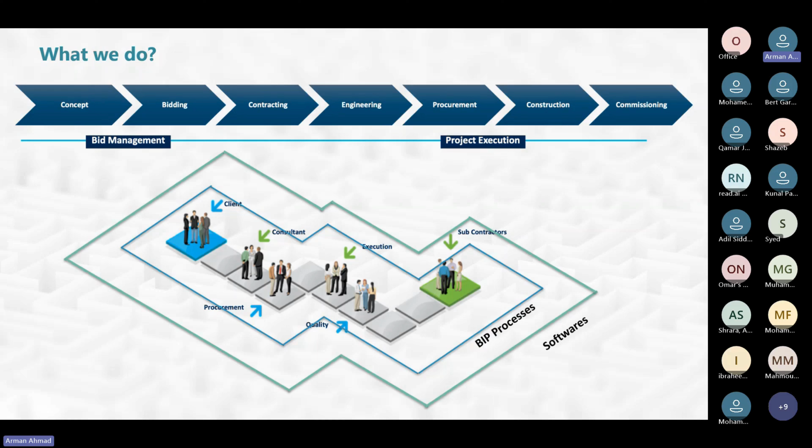Now, in a multi-million dollar project, managing those with lakhs of activities and transactions, it is very tough to optimize the processes. So first, one of our services is where we help customers, whether owner, consultant, or contractor, to adopt industry best practices. Why? Because once the process is aligned, then only we implement the softwares on top of that.

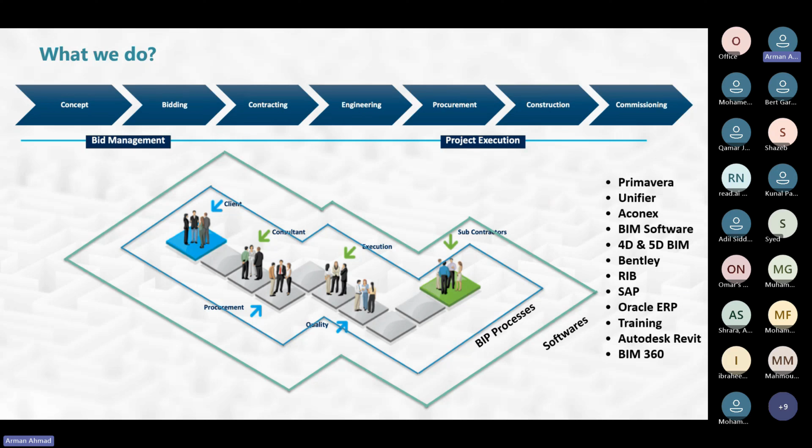So there are a lot of softwares we use to help the customer digitize that. We even guide the customer to decide which software they should buy at the time of buying any software, because we will be proposing the best out of breed from the industry, not one specific product in any industry.

Now this we have already gone through. I will quickly go through the first topic, what is PMIS. So what is PMIS?

PMIS is a digital transformation of the complete project life cycle, which includes your planning, executing, monitoring, tendering, bidding, cost control, communication management, quality management, even safety, schedule management, project charter. So all these processes we implement in such a way that every process is tightly integrated, and we also provide a project dashboard, PMIS dashboard, which takes data from different departments, different software sources, and represents it in a front end dashboard.

Now, currently, what is happening in industries? They are managing every project department in silos, where we don't have any integration, for example, between quality and execution, or execution and engineering department.

Okay, so they do manage at an individual level, but the PMIS implementation will help you get everything end to end integrated, and every project life cycle monitoring can happen on a single platform, which is the PMIS dashboard. In some cases you may have to bring data from your ERP, which is already implemented within your organization, and through that you can build a live interactive dashboard. So this is what is called a project management information system.

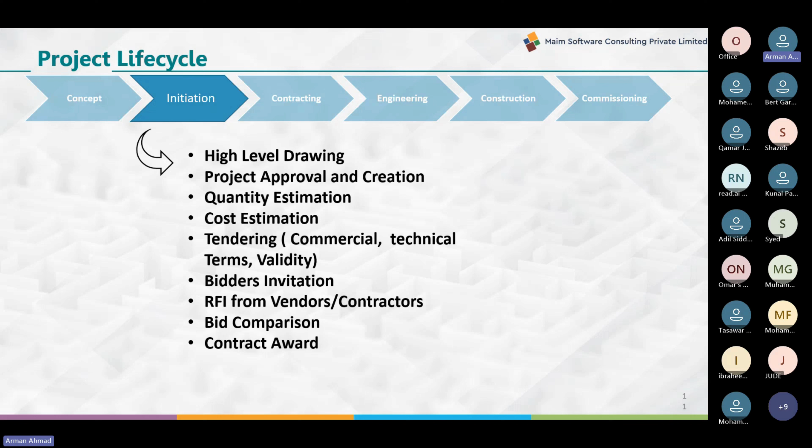Then once the contractors submit their individual proposals, you do the bid comparison, then the contract award. Then fund management, since you definitely need funds for releasing money to any contractor against the invoicing, the contract, or quantity invoicing. Engineering is the main area actually linked with BIM.

So you're doing the high-level drawing, detailed drawing, then drawing approvals, drawing changes, revision control, and BIM is actually generated in this phase itself.

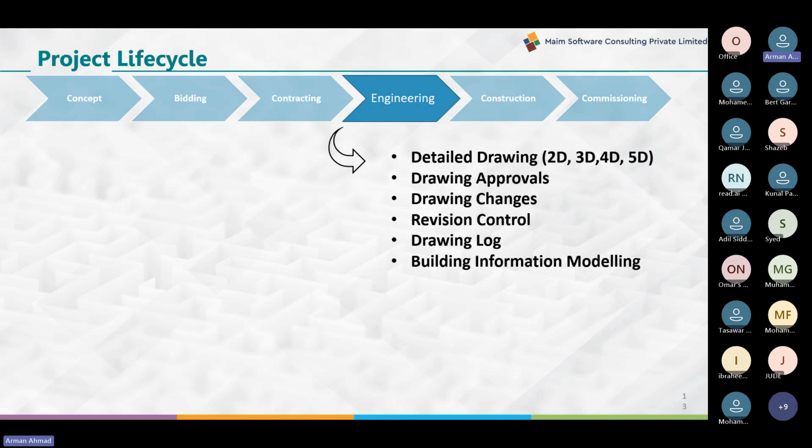Now, during construction: project scheduling, construction at site, daily reports, construction monitoring, HSE inspection, these are the processes. And commissioning includes the trial run, commissioning, site closure, sign over, handover, material reconciliation, as-built drawings, and final closure.

Now coming to understand what BIM is. Before understanding BIM, let's highlight some ongoing challenges and issues that we usually face on site.

As an example, let's say this is a metro station, and one CCTV has been installed for the last 5 years. Now it's not working. So what will you do as a maintenance engineer? You will go and check the inspection date, warranty document, who inspected it, on what date it was inspected, or you may use an asset management or maintenance software. You will log in and check all these details. The visualization is completely out of the way, managed virtually.

You will search through different data sources like Excel, PDF, and different software. Now, how will BIM help?

BIM will literally let you select this in the 3D model. You will select this CCTV, download the RFIs, who has inspected that, check the warranty directly on the 3D model. So it changes the perspective of how you want to manage the project.

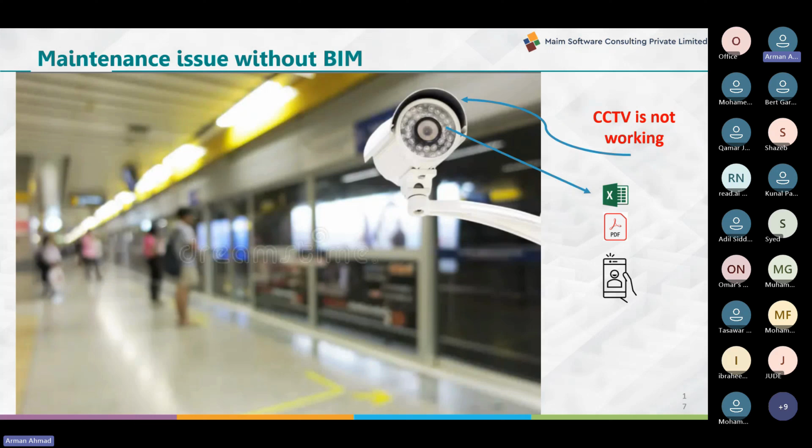So the 3D model is going to be used till the maintenance of your project. BIM is getting extended from 3D to a further level where you will explore BIM. Through BIM you won't need to explore Excel and all that. You will simply click the model and download all the information related to managing your project, managing your asset and maintenance, for fixing this CCTV. So BIM will actually help you in that respect during maintenance also.

Let's take an example of a live issue. Being a civil and mechanical engineer, you can analyze this as a design issue, where you can see that this particular pillar is getting intersected, and this is getting collapsed - a clash detected, basically from this pillar.

So how will you avoid that? This is a design issue. You will approach the designer, check the as-built drawing, and try to fix it accordingly. Or during the execution phase, you will ask your designer to change the drawing and correct it.

Here BIM will also help you. BIM will basically help you bring the civil 3D model and the piping 3D model to import into the same BIM software environment. You will do the clash detection and find it saving a lot of money on rework and so on.

So I personally like one of the big features of BIM, where you are avoiding future issues during the design phase itself, which could have led to loss of money, loss of life, and a lot of other issues. So BIM can help early during the design phase itself with clash detection.

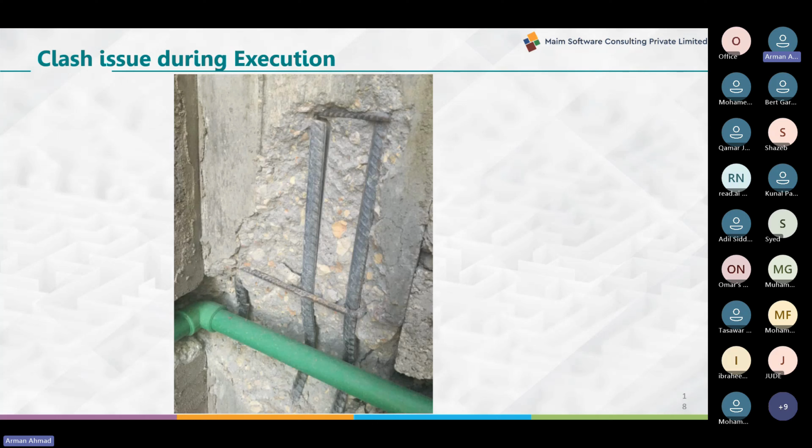Let's try to understand what is BIM. I have highlighted two problems so you can visualize how BIM can help you. So what is BIM? Let's try to understand in two aspects - one, life without BIM, and one after BIM. So what was happening without BIM currently, and everyone can agree with me on this.

Currently either you are creating a 2D drawing and from 2D creating a 3D drawing, or in some cases directly building the 3D drawing. Now this drawing is being used up to the maintenance level, but the approach is different. That means, as an example, if you want to do the estimation, you are literally opening an Excel sheet, counting all the windows, gates, doors, CCTVs, ducts, lengths, structural steel, reinforcement material - everything you are maintaining either through some software or Excel. So this is how it's currently managed.

Even in the 3D model, during the project planning itself, what is currently happening? Schedule is basically managed either in Excel, Microsoft Project, or P6. There is no linkage to the virtual representation of the progress of the project. So this is also being managed separately.

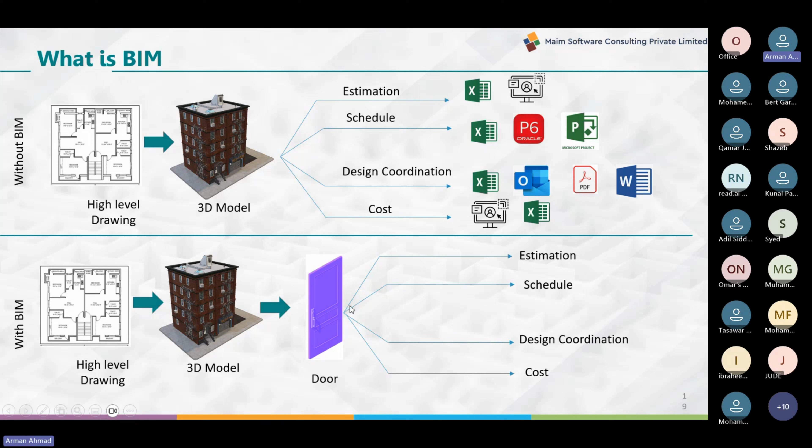Now coming to the schedule also. This door should be highlighted in red because it is critical, just like a critical activity in your scheduling software, and in this schedule you are going to link it. Now this particular door will also have the design coordinated. If somebody has a coordination issue, you can basically select this and coordinate with the drawing, even for the door.

So the cost also you can basically designate. I want to make a stop here - I forgot to include this, my bad, Mr. Yamen. But the good thing is this is the main slide we wanted to focus on. Do you have any questions?

I think just for the knowledge of the audience, Mr. Yamen Mahok is also on this call who can answer questions for our Arabic audience as well. Mr. Yamen, you can also check with the audience if anybody has any questions in Arabic language.

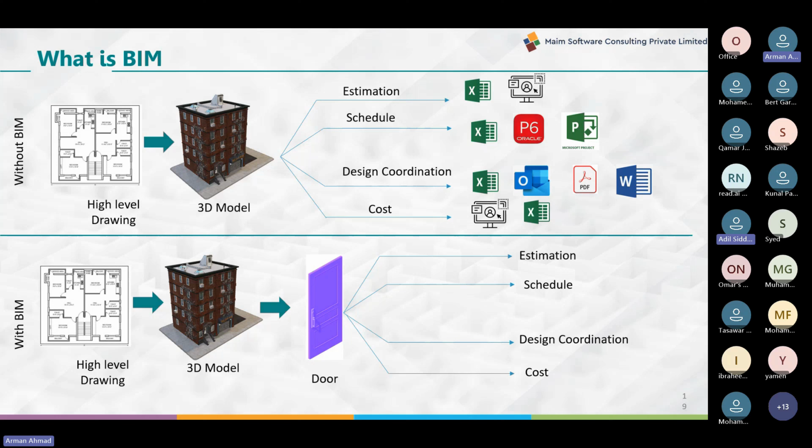Building information modeling, BIM, is a digital process that involves creating and managing a comprehensive 3D model of a building's physical and functional characteristics. Until now, before BIM, 3D was being used just as a modeling software to create a drawing, which you could give as a printout to the fabricator or fabrication site or construction site, and they would construct as per the 3D and 2D model. But now BIM extends beyond that - it integrates geometric and spatial information, data about a building throughout its life cycle, from design and construction to operation and maintenance. The best part is that it goes beyond operation and maintenance.

BIM also helps architects, engineers, contractors, and facility managers collaborate more effectively, improve accuracy, reduce error, and streamline workflows - meaning approvals. Yeah, I mean, you can add if you want. Do you want me to translate it in Arabic?

Yeah, the BIM one, because this is important.

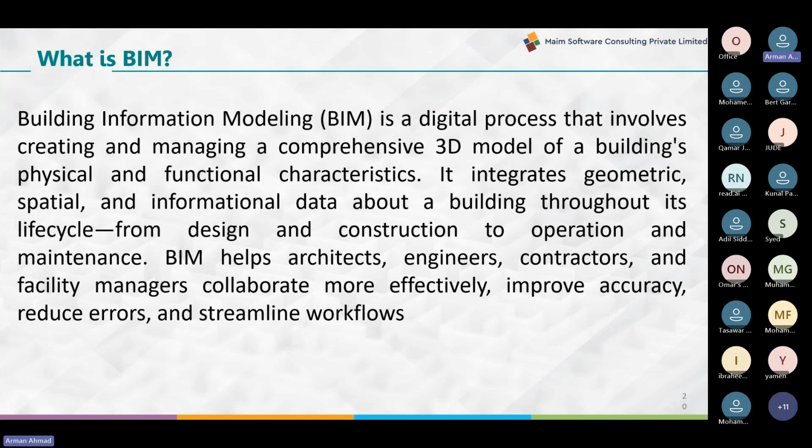Yes, you can. Now, how did it evolve? During the 90s, we were using basically Autodesk AutoCAD for creating drawings. Other software was also there, like Catia, Pro-E. Slowly it went to 3D model.

During the 2000s, the 3D model was being used for maintaining accuracy, visualizing in a more accurate way. Now we have BIM here going ahead, because BIM will also extend a flexibility of integrating this with any software with the help of integrated web services.

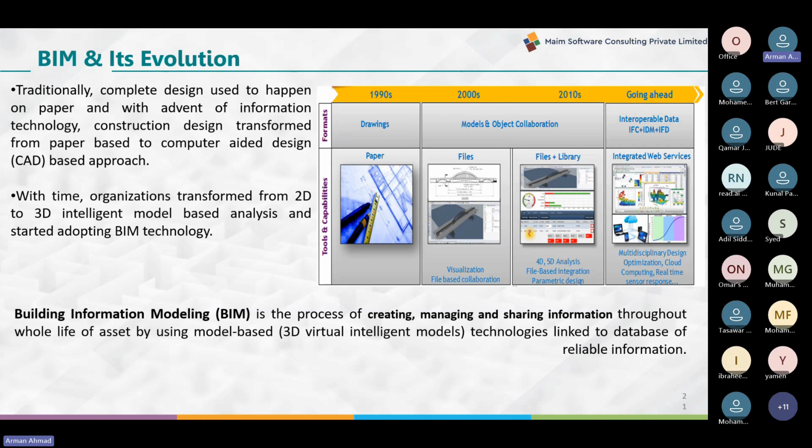So now any model or element, the drawing is being stored in a central database, exposed through web services. So you can basically go and integrate with any dashboard, or any SAP, ERP, Oracle Fusion Cloud, or Primavera, or any estimation software. All of this is integrable.

Now coming to LOD details, level of detailing. In BIM, there are different levels of detailing. When a designer prepares LOD 100, it is very concept phase, high level, and not very detailed. It is basically used for making estimation at the top level.

And LOD 200, you will see the elements are modeled with normal size and all. Even quantity will also be defined, but only as rough estimates. It is good for further design and redesign.

Yes, you can continue. Now, the same way, if you go further down, this is LOD 300, 350, 400, 500. This 300 is a detail, precise level where you will get all initial input, whether it is quantities takeoff or graphical location. It can be used for fabrication, detail analysis, and all.

350 is something where you will start coordination between different disciplines. For example, mechanical and civil, both structure and civil, you can get coordination. In 400, it is actually being used for shop drawings, manufacturing, assembly planning. And last is 500. That means once your facility is being constructed, actually what has been built, you will create as-built. So these are the four more.

Mr. Arman, I have one question. Tell me. Sorry, can I go ahead and ask the question? Yeah. Okay, thank you. So generally, for all these LODs, for the various categorization that we show over here on the screen, is there a particular kind of set of user categories who are entitled or who will be basically consuming this classification, that I'm trying to understand?

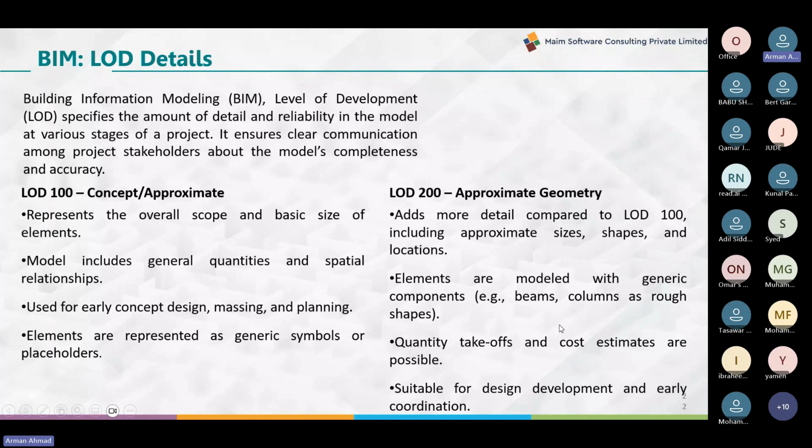Yes, this is a good question. So there's two approaches. When the person who is actually designing the software, the design department, it will be the same, starting from LOD 100 to LOD 500. Maybe in some companies they do have a detailed designer, like it started from high level LOD 100 where a senior designer was constructing it. Slowly it has gone to the beams and pipes. The same designer is being involved, who is creating this drawing in the BIM tool.

But the moment it comes to LOD 350, now the other designer comes in. As an example, we have seen a case of pipe and civil structure. The pipe model may be designed by the piping vendor, and the civil is being designed by the civil vendor. So more detail you go, more interaction or more different stakeholders come into the picture. The more detail will go, the more stakeholders will come into the picture, and they will be involved in this further detailing. Is that fine, Adil?

I have one more question that I'll ask later. Ah, okay, no problem, sure. Thanks. Somebody is asking like how to reduce cost from BIM, something like that.

Yes, Mr. Ali has that question, I think. So basically, as a whole, we will talk about the benefit at the end. We have a slide on what is the benefit as per research already done by some known sources. Then we'll discuss, and I will put my point of view also on how it will reduce the cost.

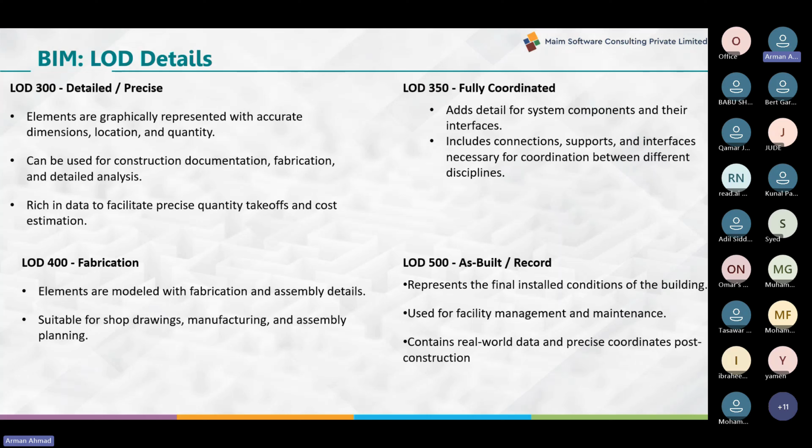Now let me walk you through one of the features, and slowly we'll go through different features. Clash detection. As you reach LOD 350, you're going to start doing the coordination with different models.

Now, you can see that we have seen these issues during execution, and it really impacts a lot of rework. But here's the good thing: if I'm an owner company, I've deployed three different contractors, one for piping, one for structure beams. So this beam model, when you import it into the BIM model, along with the other model, because you've already given a high-level drawing to both parties, if anyone makes a mistake, it will create an intersection, that is a clash.

So before, this is what used to happen: I spent a lot of time inviting the designer who initially designed the model to explain why we're facing this issue. Usually the designer who designed the model was not frequently visiting the site. But due to BIM, the clash detection feature saves a lot of rework, money and time, because you're doing the clash detection directly on the 3D model itself.

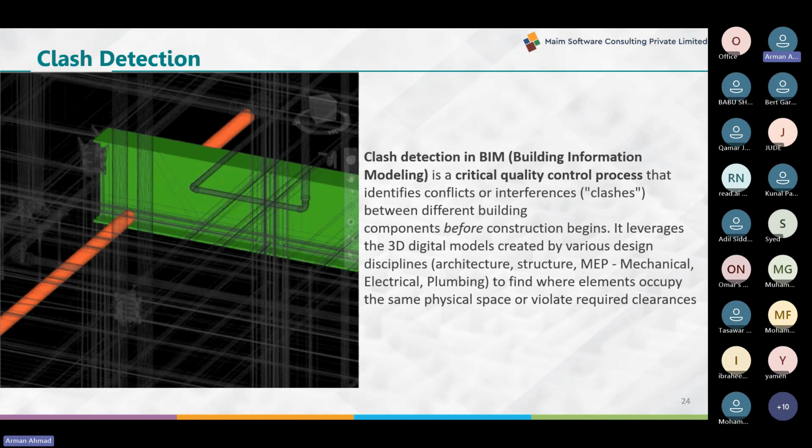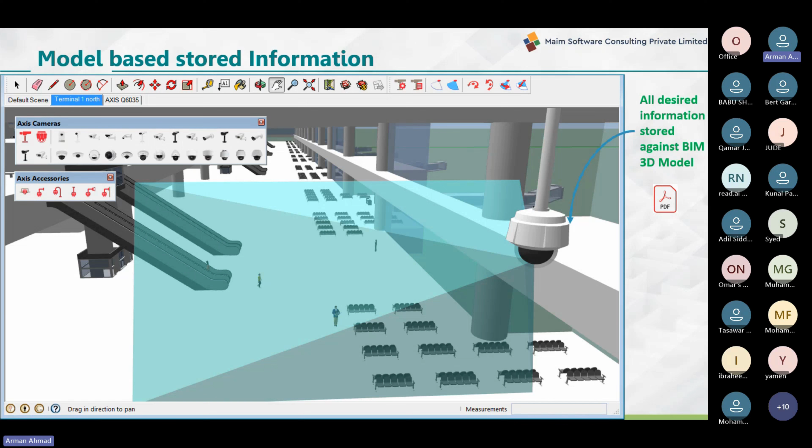There is another advantage you get, which is model-based information. If I say model-based information, that means the length, breadth, height, make, brand, and quantity, all of this will be stored against the model. So if I pick any 3D model and click it, you will have all the information, including the length and breadth, and the position you want to see. All of this is stored against the 3D model.

There is another advantage, the material takeoff. This is one of the great features for basically doing estimation. How was estimation done previously? Literally out of the 2D drawing. When I started my career, my manager asked me to calculate the BOM of each drawing: how much structural steel there is, what the length is, what the size is, what the make is, and make an Excel sheet, because that would be used to multiply by the rate to get the total material cost of the project. This was being done manually.

A lot of software also came that did this, but BIM gives the flexibility that within maybe a maximum short time, you can very easily download the elements into an Excel sheet. From there you can add the rate, which means you can also load the cost of that model. So it gives the flexibility to give the right estimation of your project.

Sorry, I already missed it. So this is important, I wanted Yamen to repeat the material takeoff slide in Arabic. My bad. Yes, no problem. Actually, guys, if anyone has a question in Arabic, he can ask. Ahmed also described it very well. Can I talk now?

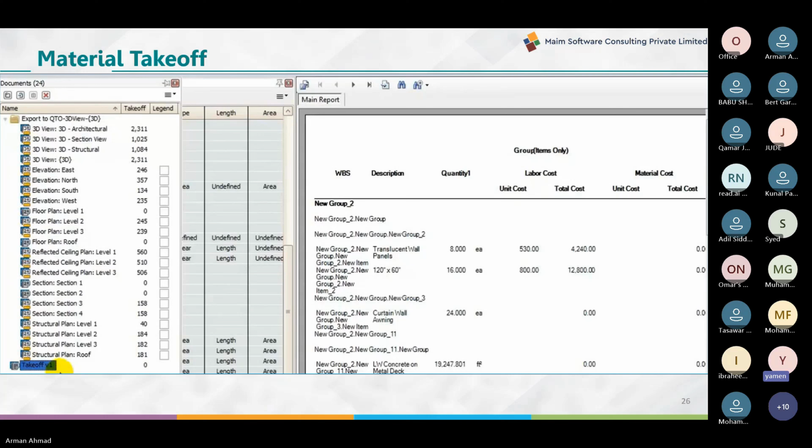Yes, you can continue. Thank you. So this is what I was telling you, that out of the material takeoff you can do the estimation, or even use this takeoff for your estimation software. There are a lot of estimation software like Cost OS, which you can use with this takeoff to get the cost estimate of the project.

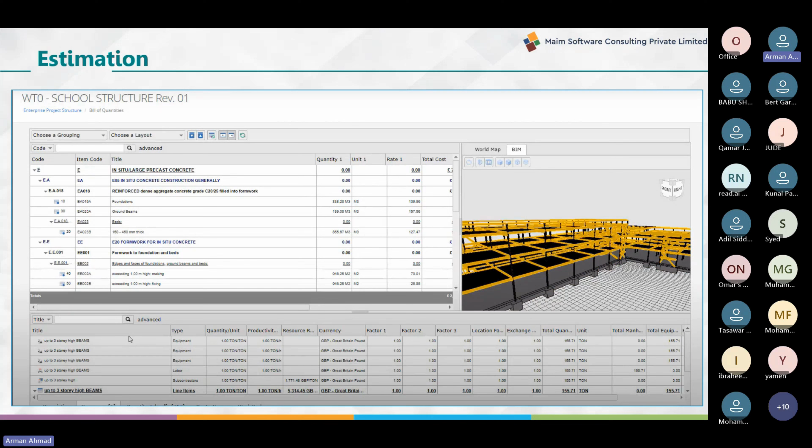So, till now, do you have any query, input, or anything you want to ask? You can also message in the group.

Yeah, I think that cost part is still unanswered. Maybe you want to take that later on in the slide. Yeah, plus there are more questions coming up later in this session. Yeah, fine, thank you.

Okay, now this is one of the great features, since we already have people from the background who have used Primavera directly or indirectly. Primavera is one of the preferred scheduling tools in the market, and even Microsoft Project also.

So basically, when your 3D model is linked to time, it is 4D, and when it is loaded with cost, it is 5D. What does that mean? Let's say if you have a building and door is an element. In the 3D model, I know the length of the door, height, make, quality of the door, everything, but I don't know when it will be installed. So it should have two data: one is the baseline dates, and one is the actual dates.

So 4D means I will assign all these elements with the respective activity of the project from P6 or any MSP, and every element will represent when it should be completed and when it is actually completed, highlighted in a color. Or if it is not completed, it should show something in red. That means now virtually you are getting a live status of your project.

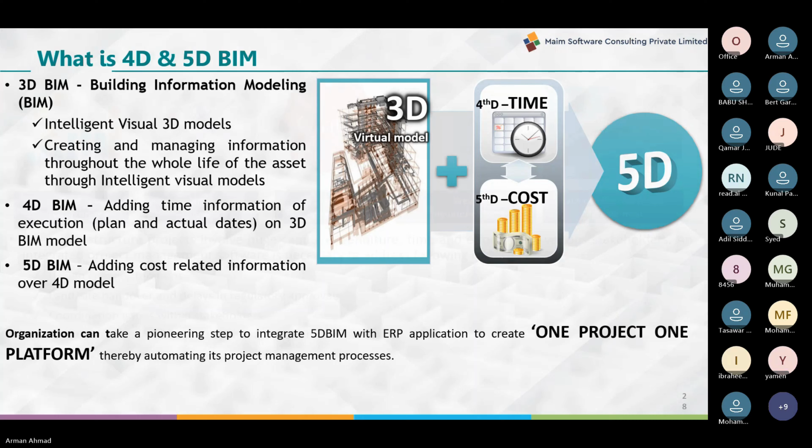So why 5D BIM? Because definitely it is going to reduce cost overrun. The reason behind this is you are analyzing the cost directly on the model, and there is very less chance that you will be wasting a lot of effort applying more resources than actually required.

Time is also saved, because here you are not going to learn a new software to monitor time. As an executive you will virtually see which pillar is completed and which one is not. So higher management will literally zoom in and watch it.

In my personal case, when I was involved in India's first 5D BIM project, there were two TVs installed. One was giving live CCTV footage of the site from different cameras, and the other, the director of the project, was visualizing the project by 3D model, so he could zoom in and check the performance of the project virtually.

Quality also improves, because features like clash detection create a high-quality ecosystem. And also, document management is a bigger challenge, and there are a lot of software in the market which do document control.

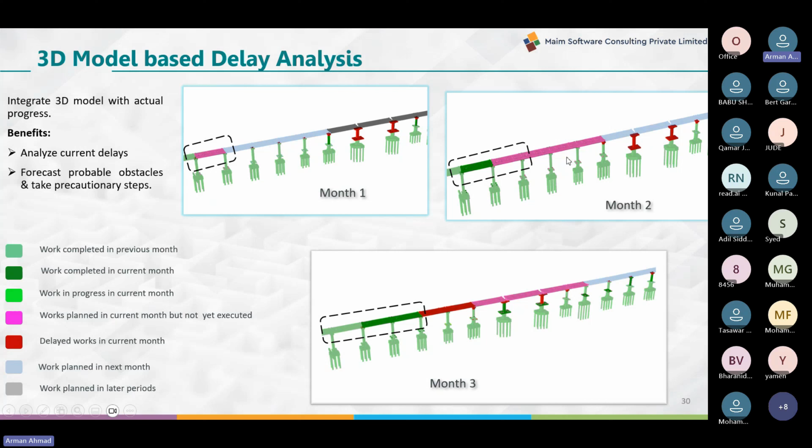Now this is another feature which BIM provides, and I have taken one screenshot from that, because you are going to load time and also cost in terms of different factors like BOQ cost. If you are an owner company, then BOQ cost is your own cost. If you are a contracting company, then your BOQ cost, material cost, and labor cost—all these costs you can distribute.

Now the moment you distribute it, it is also distributed in a time-scaled way—January, February, March, April. Through that time-scaled way, BIM also calculates the earned value curve, depending upon the cost assigned for each month.

So in your BIM software, not only time progress, but also the cost progress you are going to get. Now one thing I just wanted to highlight.

For achieving this, what do I have to do as a BIM consultant? This is one question. There are two major, bigger challenging tasks: one is importing the 3D model into the BIM software, and selecting each and every element. This is massive work, not easy work.

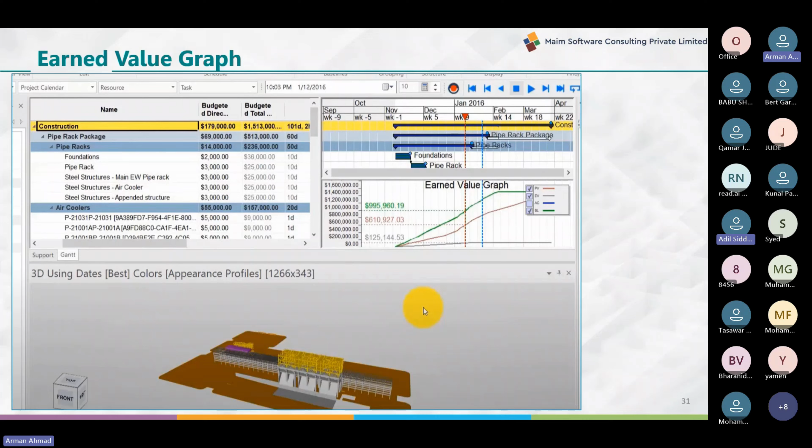I think you can continue, Mr. Ahmad. Yeah. Thank you for the question, and the answers we can continue later in the session.

Now you will see this—this is one of the screens which I have taken from one of our past projects, where we'll see this video directly. Give me a second. Here we'll see the time progress, the time stage of the project. Right side is the modeling and left bottom is the cost.

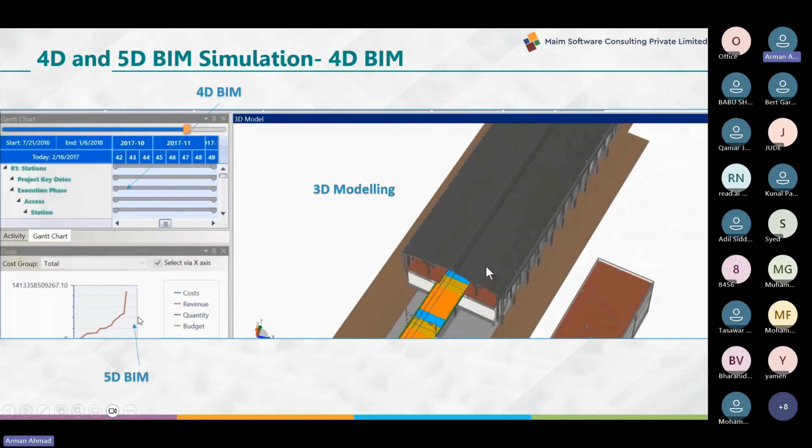Now, what are the different applications available in the market to explore and purchase? Autodesk Revit is there. Most people in the construction industry are very well versed with Autodesk. They have Revit, and then they have Navisworks.

There is a company called Bentley Systems. Bentley has a plenty of variety of software, divided into different modules, like ProjectWise, then Synchro. Bentley Synchro does 4D and 5D BIM. Then there's also RIB iTWO, another company which provides this BIM feature.

Then there is Tekla Structures by Trimble. Trimble has their own product. Autodesk also has Assemble, so they have multiple software like Navisworks and Assemble, and both do the same part.

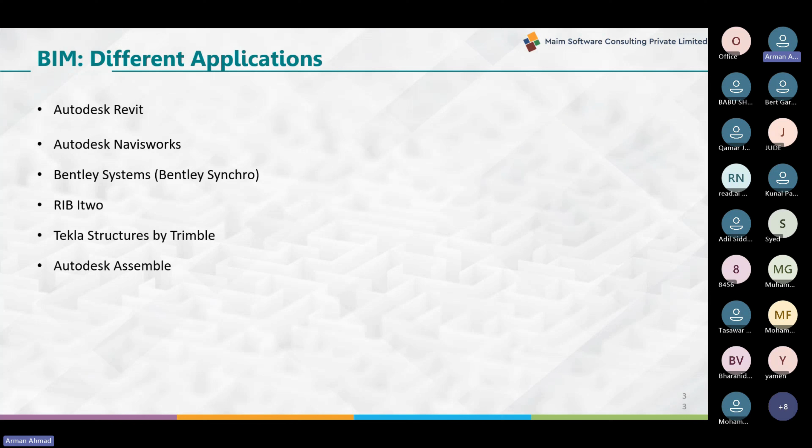Navisworks is good for contracting-based companies, where you are purchasing the items on your own. Assemble is best for both the nature of projects, whether owner or contractor.

Now let's talk about one of the PMIS solutions built over BIM. This is the final solution we wanted to present in this webinar. When we talk about PMIS, we already know it's an integrated system where we get information on the complete project processes, status, and cost from an integrated system with the help of multiple software. But here we'll also see how BIM will look like in terms of building over BIM.

I have designed this solution based on one of my past case studies. It was for Nagpur Metro in India, built over 2016, where different software was already being implemented. I derived this with our best industry practices and my own experience.

So let's say you already have multiple software in your company. You have 2D drawings. Previously, the 3D was being designed out of 2D, but nowadays you can start building the 3D directly on the BIM model or BIM software. So designing and creation of the modeling is the first step—that means you are literally creating the 3D model, and on that basis you are doing all the other processes.

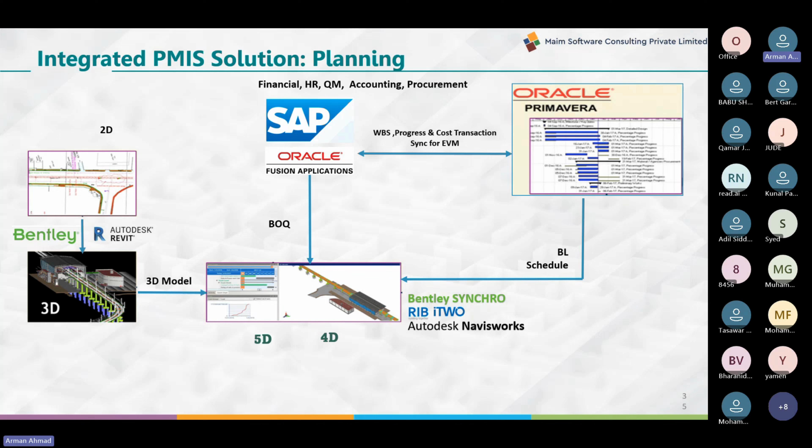So I will show you a simulation video. It will show you the baseline—you can see this through this video.

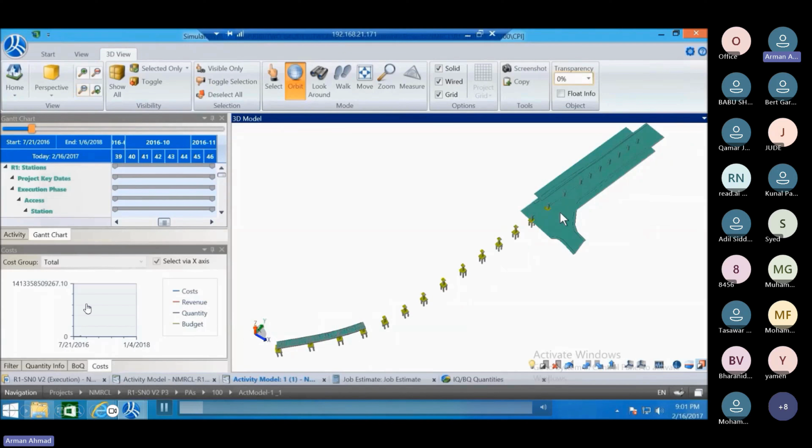In the left top, you have the time planning. Bottom is the cost planning because you have already attached the cost. And the right bottom, you will see the fashion of each element getting constructed.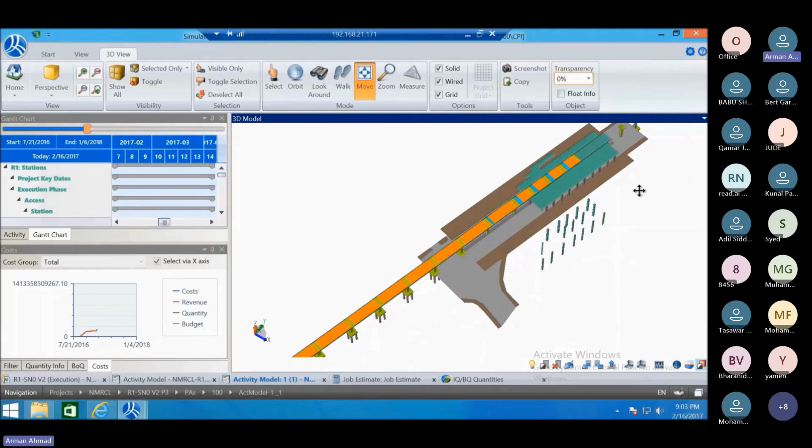So that means if pier is being constructed below the viaduct and near the stations, and if you made a mistake assigning the predecessor and successor activities in P6 and assigned it to the 3D model, the model will also simulate in a wrong way. Maybe the viaduct and bridge will get constructed first and the pier will be last.

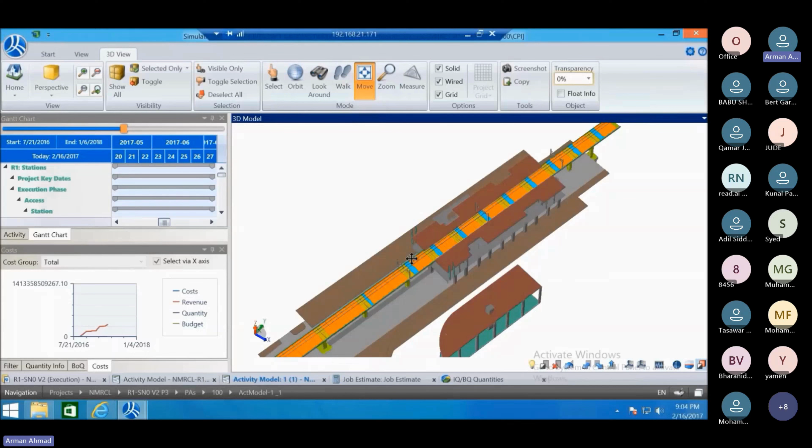That's a worst case mistake which we used to make. So your predecessor-successor assignment determines how this flow of construction will simulate. Your project plan is now totally going to visualize to higher management with visual project, showing construction happening depending upon the predecessor and successor of the activity assigned in P6, which is integrated with the schedule module of that BIM tool.

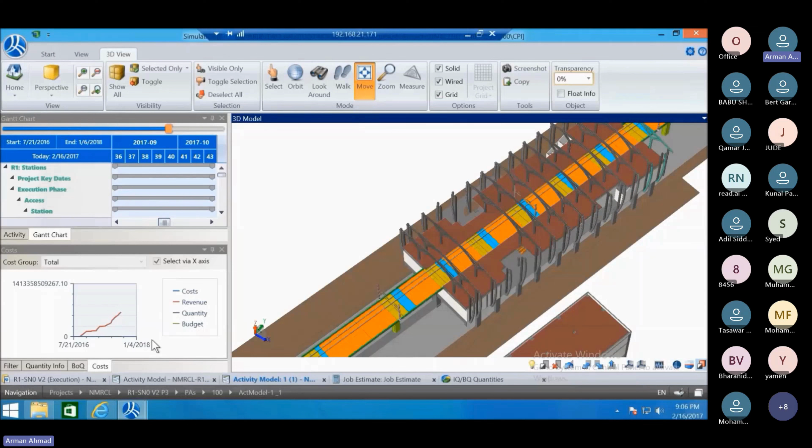In the bottom, you will see that slowly you are completing one activity and element after another in the 3D model, and definitely you're consuming cost also. So this way you are having a clear simulation of your planned project.

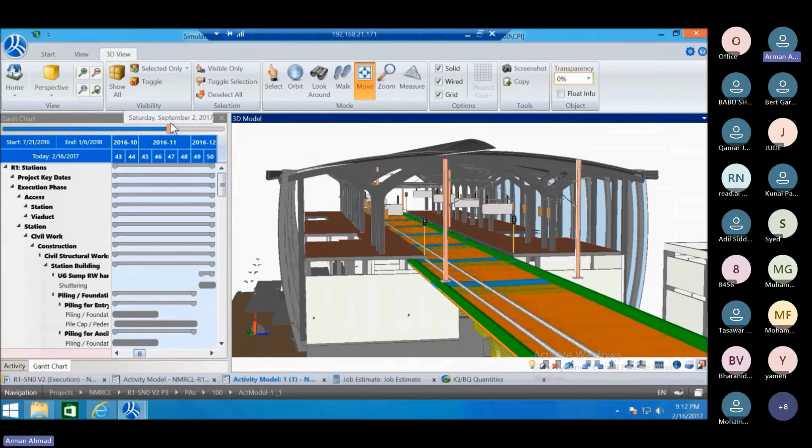Now you can see this is completely integrated. That is why it is called PMIS-based, integrated BIM-based PMIS solution. Now you can see it is being constructed slowly, you can zoom and go there, and you can see this project is as per the plan. So it will visualize how your project is going to be executed in the future because it's a baseline.

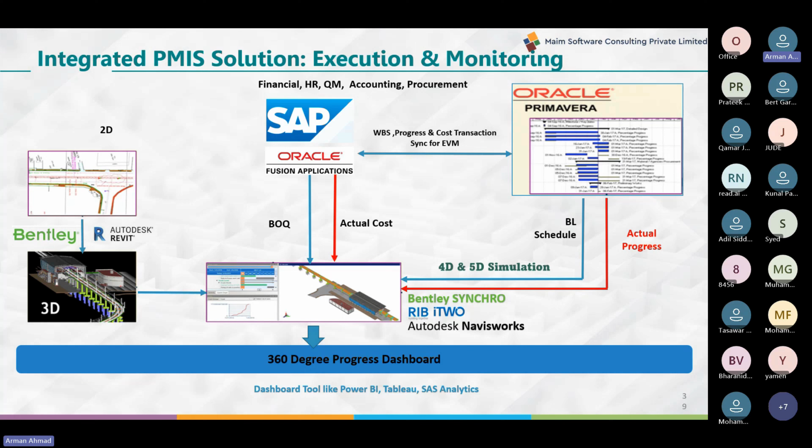Now we'll talk about the benefits. What are the different benefits we are getting from BIM-based PMIS solution? During design, it definitely avoids a lot of rework through clash detection. You get latest information and detailed planning. During planning also, you get the critical path visually highlighted through different color coding.

During execution also, if you integrate from SAP, it gives value addition to the execution team itself, because they are not going to analyze construction compared to Excel or Word. He will literally be opening the model and checking every detail in the software directly over the 3D model.

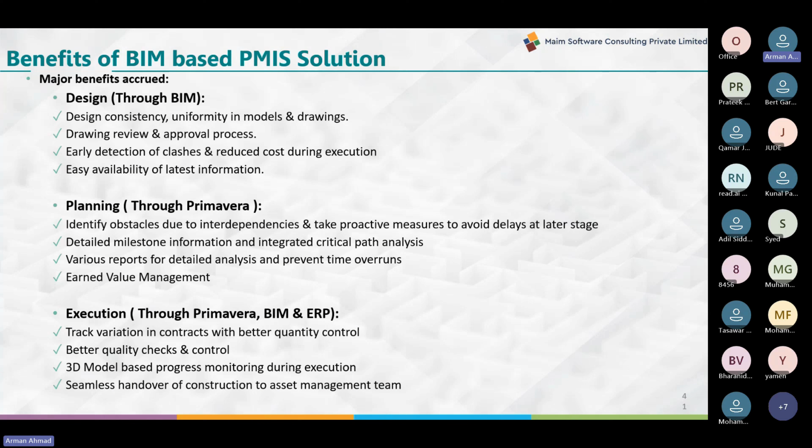Now, this is one of the benefits being captured, and the main part is a study done already in 2015 by EC Harris, where someone was asking how much cost is being impacted. Yes, definitely it reduces major cost by 30%. The reason behind that is clash detection, which avoids a lot of rework, design issues, and design aspects.

Even during construction, if design is perfect, construction issues also get resolved. Even during construction and operation - operation is one of the most important things, where maintaining an asset, you will have a real-time effective solution because it saves huge time in maintaining any items. If any equipment stops working, most time is spent in maintenance of that, but before that, literally searching for the respective document related to maintenance is now way easier and faster. So I think the question raised about cost has been answered, right?

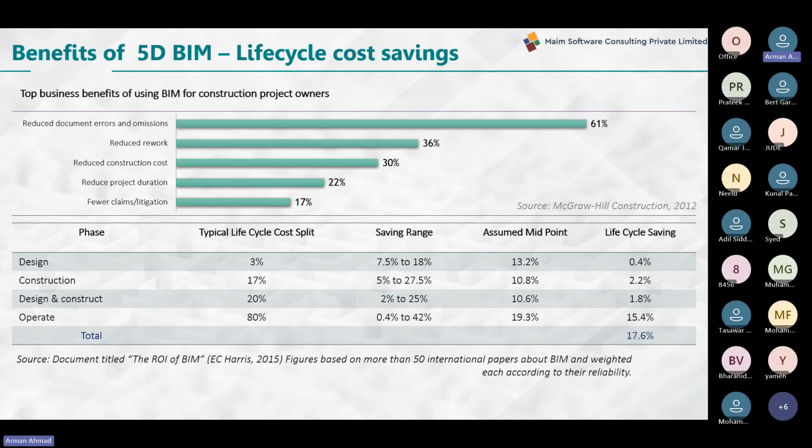Now, as I told you, the dashboard is one of the major key areas where everyone wanted to integrate. Dashboard is not about creating a nice dashboard by taking Excel exports and loading into a dashboard tool. It's about live integrated data directly from the database of different software, whether BIM, Oracle, Primavera, or Unifier, so there is no manual intervention in generating dashboard data. This has advantages - you can have the dashboard directly on the portal.

Asset management and maintenance is one key area where you get basic advantage. In one of our case studies, for managing the asset, there was a module called SAP Plant and Maintenance, used for maintaining the asset register. What is an asset register? Once your facility is up and running, you should have a directory of the complete asset. There is a tagging method in the model itself - you can tag the asset ID. Whenever a corrective action or permit of work is required, you directly use that model to manage the directory of the asset. It's no more tabular form data.

The same way, it helps in seamless handover from the project people to the asset management team. Previously, the handover from project to maintenance team was very tedious work, because we had to create as-built documents, do lots of checks, sign-offs, approvals - that takes huge amounts of time. To start the maintenance work, BIM will definitely help the maintenance people to avoid this.

The best part is that you can attach all related manual documents against the 3D model. You don't have to maintain a folder structure or search for documents - you can do it literally on the BIM itself.

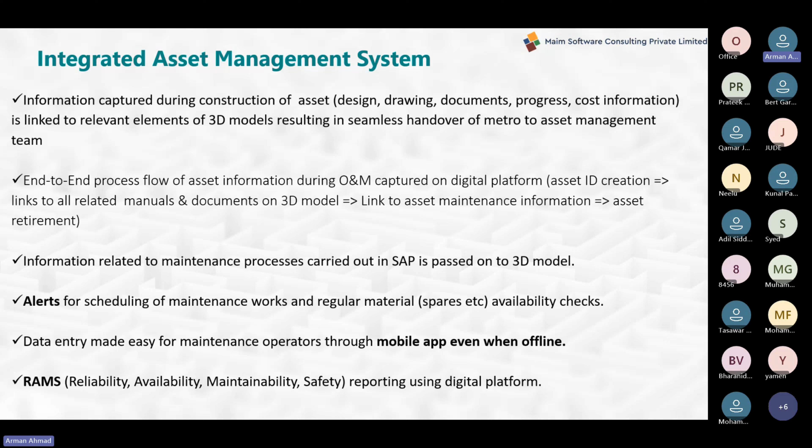You can also update the respective information on this 3D model during maintenance. For example, if you want to update that a particular asset, say some CCTV, is being maintained on the 3rd of September, that information will be there itself. So the idea is that the complete BIM is storing all of your information virtually.

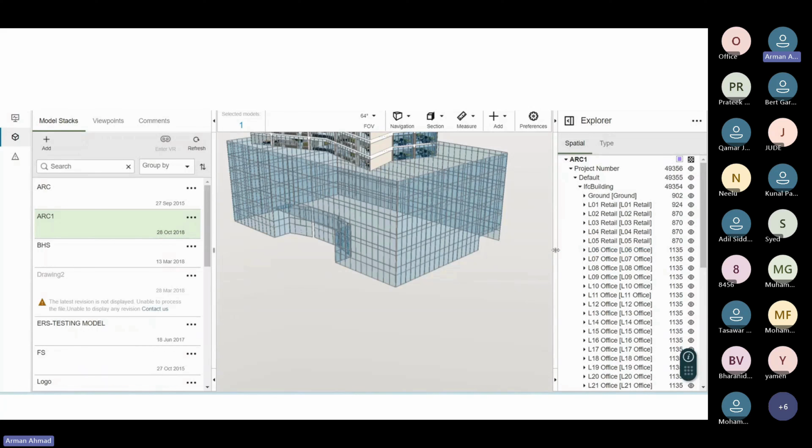I just wanted to run a video, and meanwhile I'll ask everyone to ask your questions and queries. I'm done with the webinar. I'll keep running this video, one of the projects which Mr. Kumar has done. You can view this video to see how BIM is helping. Meanwhile, I will ask everyone to ask questions.

Yeah, Mr. Adil, I think somebody asked something, right? I forgot the question. So basically the question was related to KPIs - how are KPIs defined and monitored in a BIM enabled PMIS. I think Mr. Venkat had that question. Yeah, this is a good one.

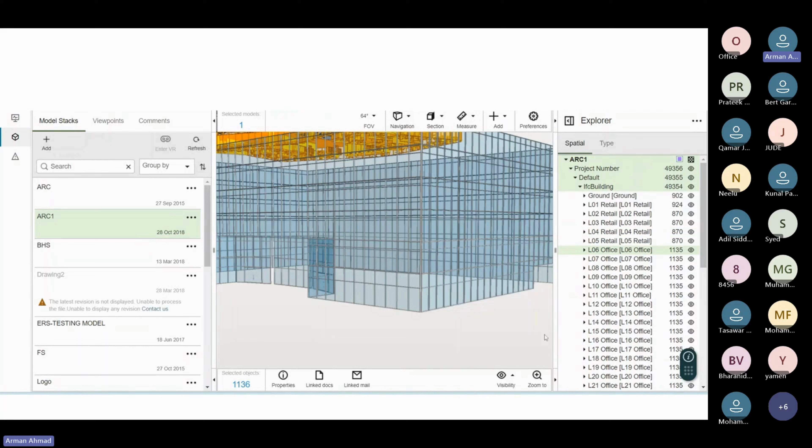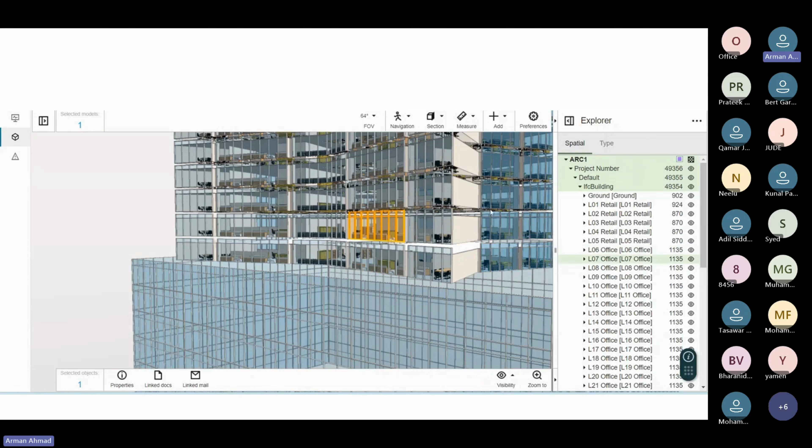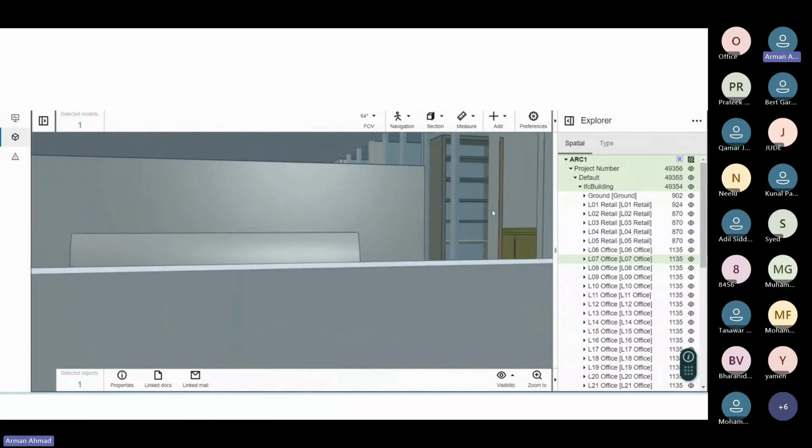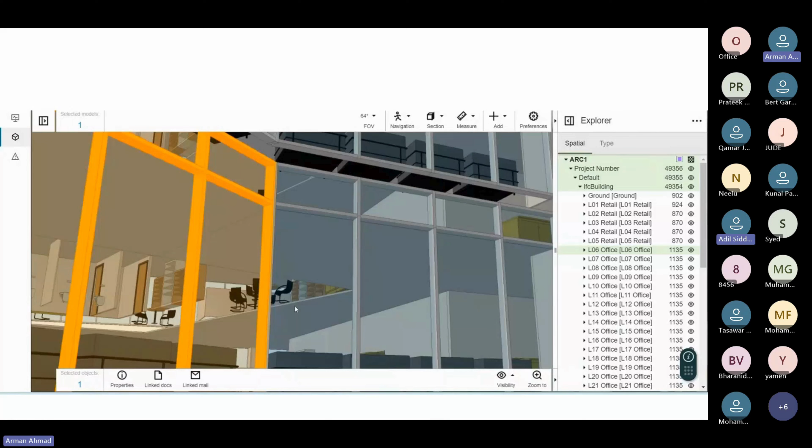I think this is clear. Additionally, you get more KPIs through the model. You can see this - it is a live model. It is already being constructed, so we can go and check these models and elements directly.

Okay. Yeah. So Mr. Venkat, is that answers your question?

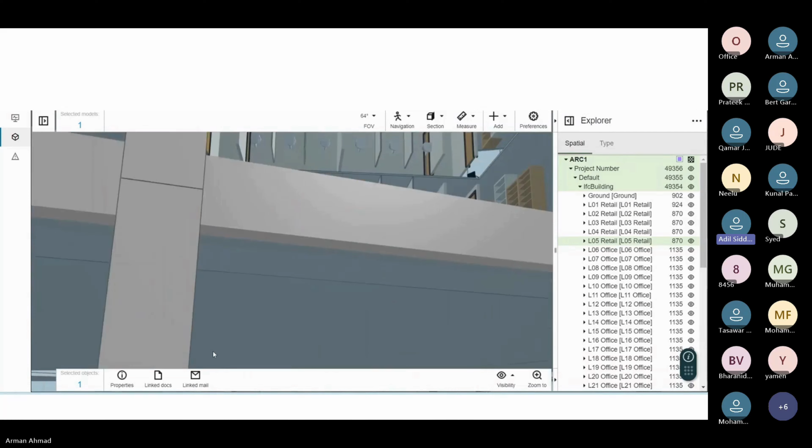Yeah, that's fine. And one more question I have - can you use Power BI for visualization?

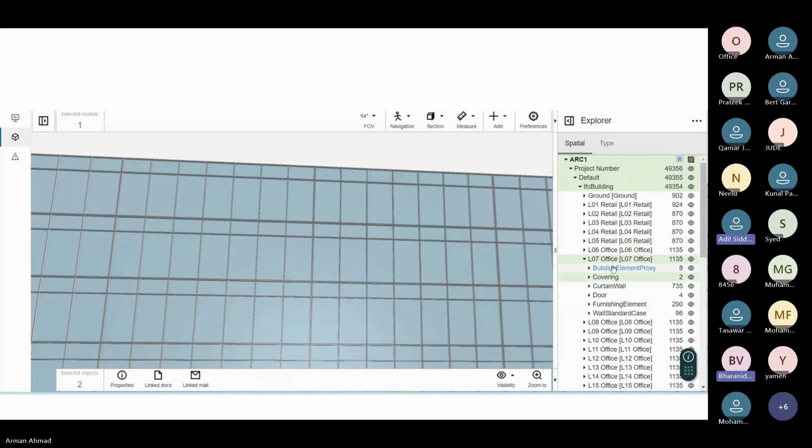Your voice is a little feeble, Mr. Venkat. Sorry, is it okay now? Arman, can you hear him? It is coming from very far, I think. Can you come closer to the mic? Yeah, okay fine. Is it better now? Hello, yeah please, yeah it is better.

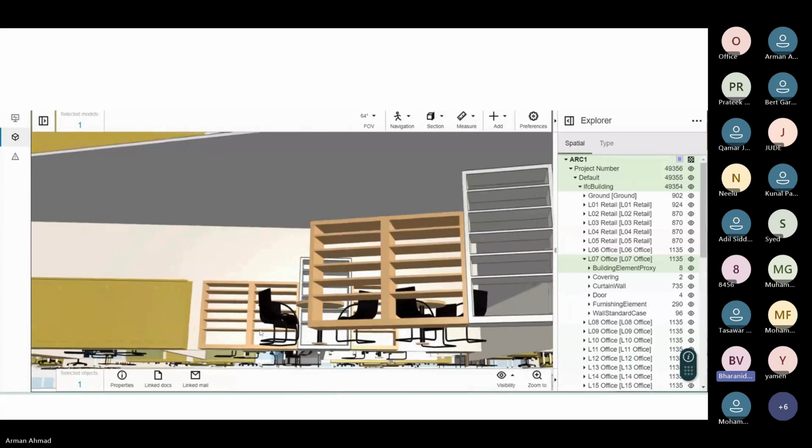So is it like, can we use Power BI to visualize clash detections or model coordination issues from the tools? If I heard it correctly, you are expecting to use Power BI for clash detection or something? Yeah, or model coordination, you should see within the tools.

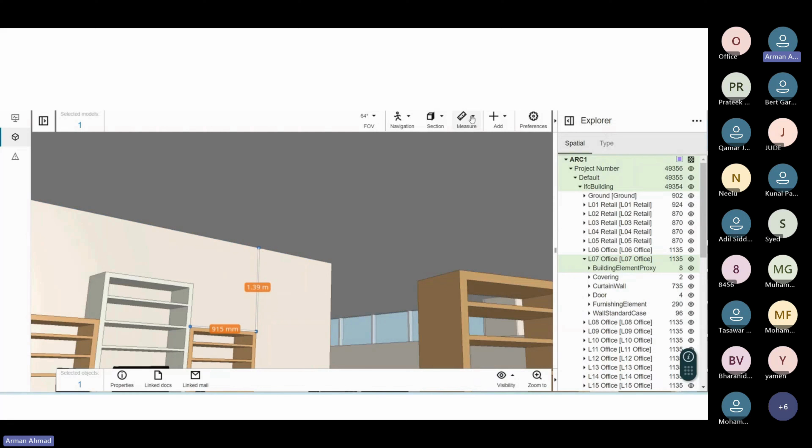Okay, so see, this Power BI is basically - the purpose of Power BI, we already know, is that it's taking the data from the database with different techniques like maybe APIs or database credentials. You bring the data, or through Excel you bring the data, and you design the dashboard. Now we can get the database of the BIM and bring the data into Power BI.

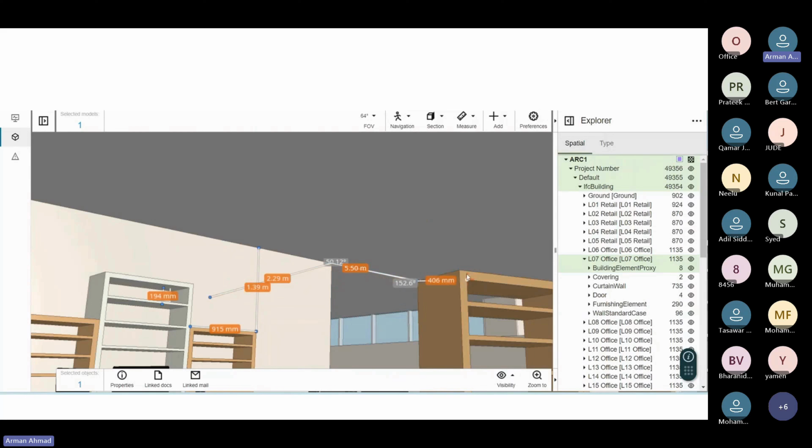But if you visually want to analyze or do clash detection, what we have to do is basically open a custom portal in Power BI, build a custom portal of the URL of the BIM module, whichever you procured. So Power BI technically will not do that, but yes, you can bring that BIM URL clubbed into your Power BI and visualize that.

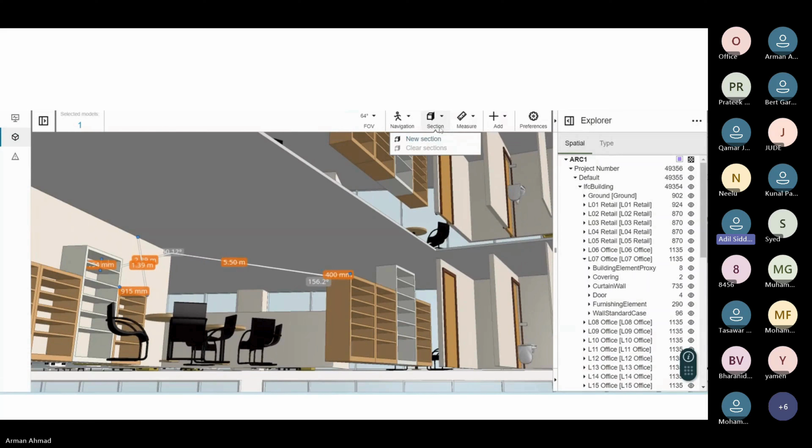Is that fine? Yeah, okay, fine. Thanks, Venkat. Does anyone else have any questions which you can ask to Mr. Arman on BIM or Primavera?

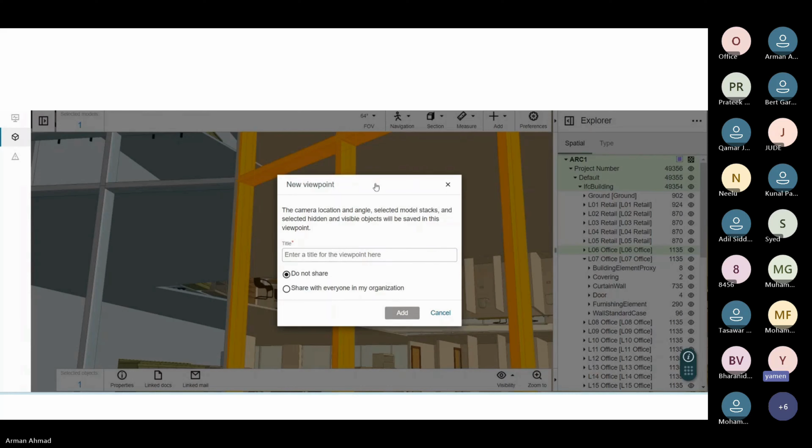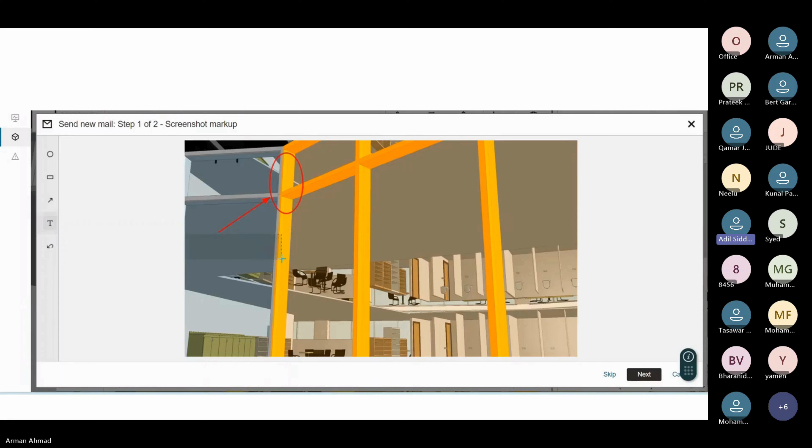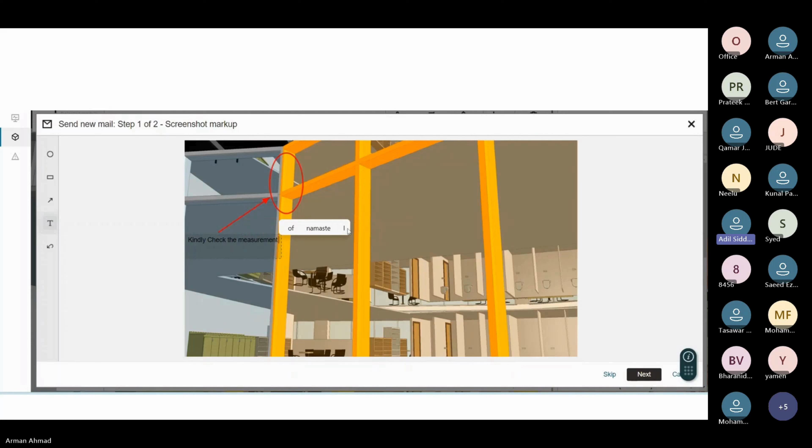In the meanwhile, Mr. Arman, I have one question related to the security of these drawings and models. Basically, in BIM we create various drawings and also some important models which are very crucial and confidential in nature, critical to the organization, and they contain certain monetary value as well because these are exclusive designs. So how do the solutions in BIM provide any inbuilt security feature to protect the data? Data protection is very important here because there are multiple teams working - contractors, other vendors and other team members. So it works across various teams and models, so how is the data protection taken care of?

Or I can add a little more - if there is an inbuilt solution, you can let me know, else I can suggest a certain solution which can help for the protection of data here. Surely it will be great. After my answer, I think you can add that, because that point of view is very important.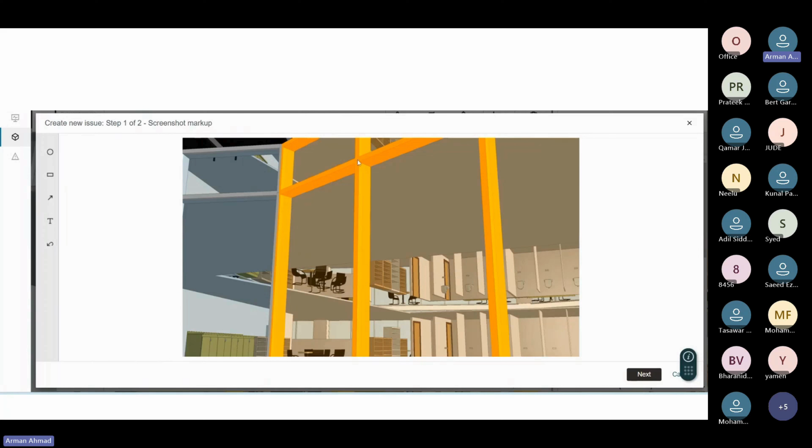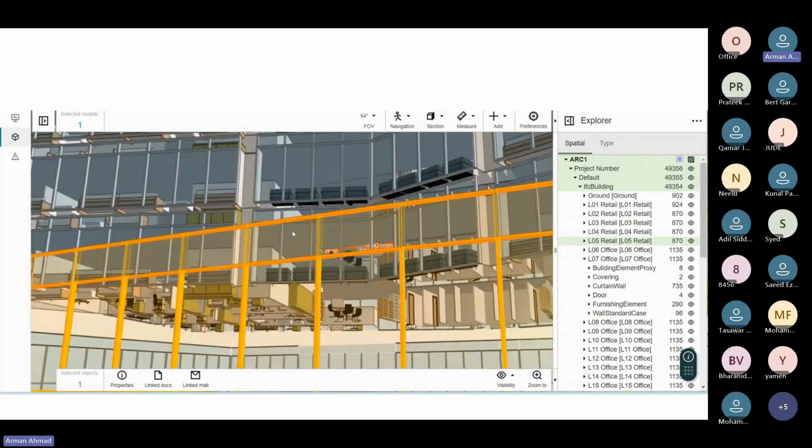Okay, now coming to a very practical example where I was assigned in a project, when I was at the construction site as a planning engineer. There was a policy in that project that after the fabrication or erection is completed, literally they have to burn those drawings in a pit in the backyard of the office, and officially it was being closed. It was burned.

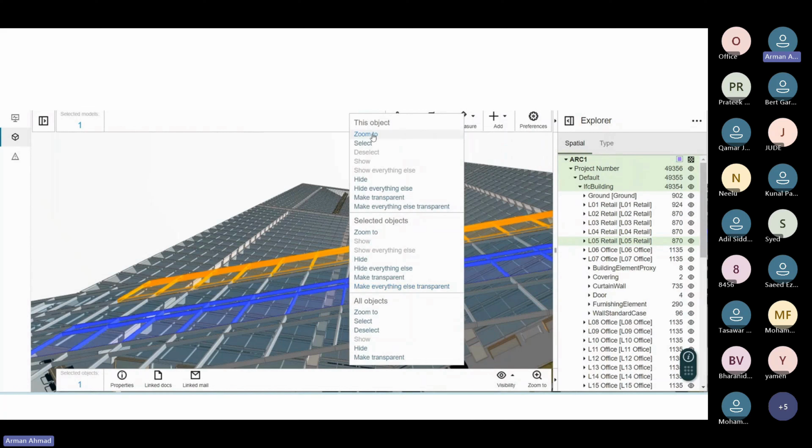Why? Because it was so confidential in nature, that drawing and design - you rightly told that in some exceptional cases, yes, this is one of the serious concerns. The moment you have the design exposed to any other party or any competitor, it is a big issue for that.

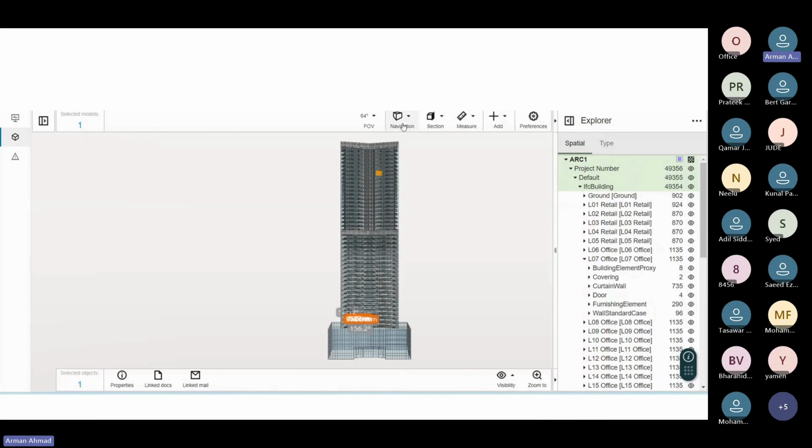Coming to the exact answer to your query, the answer totally depends upon which model, which software I am selecting - there are a lot of software options. Now there are two types of BIM software in the market: one is the installable software on your desktop, and also a browser-based one. Now definitely when this browser-based option comes into the picture and it is being stored with a mechanism or database layer, then application layer, then you have all the aspects of cyber security.

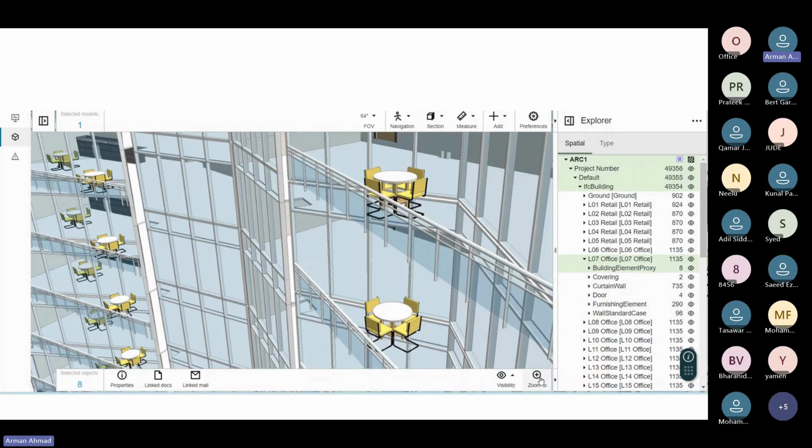Starting from the database level, then at application level, even the OS level and the server level. Majorly all products comply with that, because they have to sell in the market and compete. The same way, all the required cyber security checks which is being done at each software level, that is also very important and already maintained by each service provider.

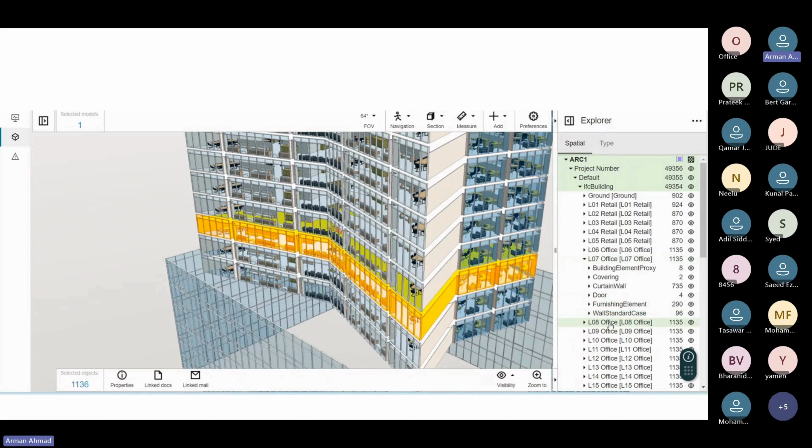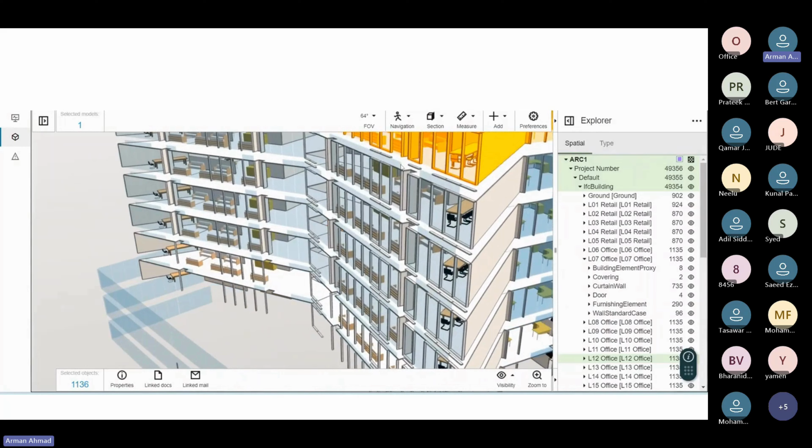There's a second aspect at business level - you will not be having access to the complete building as an example. So as a level of security, or access privileges, if one guy is a civil engineer, he will have only read access to everything. He cannot see the size, the cost, the make, and everything - he has limited access. That thing also is being maintained by these service providers.

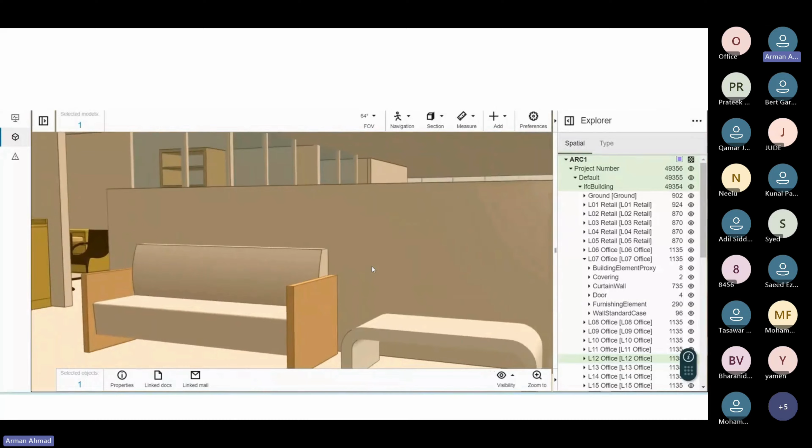Individually, how much detail they are managing, I need to go and check each and every module wise. But since it is being maintained as a database and application architecture, you have all the security aspects already in place.

Now I wanted to hear your proposal from a security point of view also. Correct, so thanks for giving an insight about the inbuilt security features that would be basically catering to the needs for the requirement.

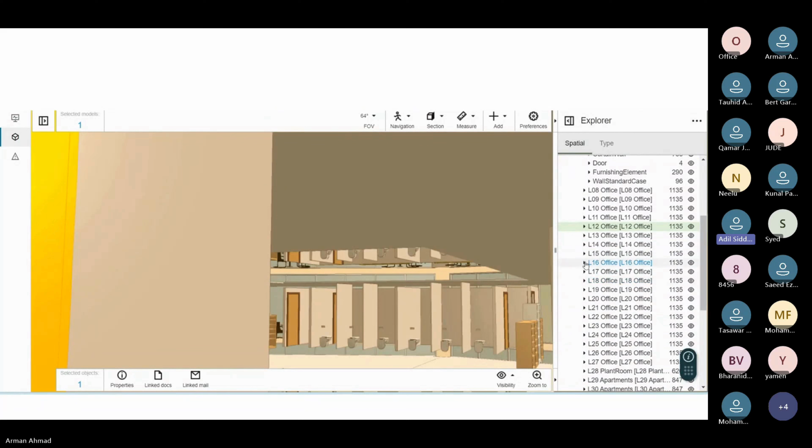But I think one stage is where these files are getting exported to the local systems. These drawings, if they get downloaded into the end user machines, that is where the challenge starts. And for that particular aspect, I think the technology called data classification, which is available in the market from various OEMs, manufacturers like Microsoft.

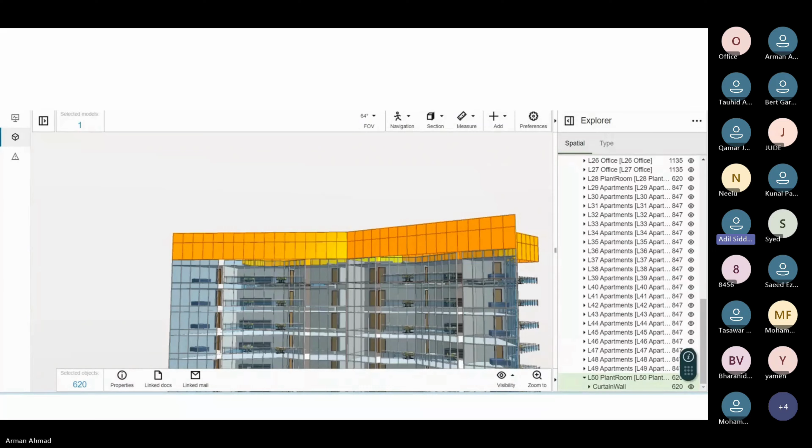We have MIP or AIP, we used to call it for data classification. And then we have tools from Forcepoint. Then we have security solutions from Varonis, and a tool which was earlier famous called Titus and Boldon James, which has been acquired by a third company.

So these solutions were very popular in order to classify data, because this comes under the unstructured data format. So what I mean by unstructured data is, data is generally classified into two forms - one is structured data, for the knowledge of the audience, and second is unstructured data. The structured data is generally stored in the databases in the form of table, rows, columns.

And the unstructured data is something which is huge in amount, volume. This is basically all those files, Excel files, images, videos, which are basically stored on our repositories, on our local systems, laptops, desktops, even file servers. So that is the unstructured data.

Main challenge or main worry for the organization is sitting on that pile of data, which is a huge amount of data, but the organization doesn't know how much data is critical, how much data is confidential, and how much data is okay to share to the public. So that is where the data classification solutions come for the rescue and help of the organization, along with a data protection solution as well.